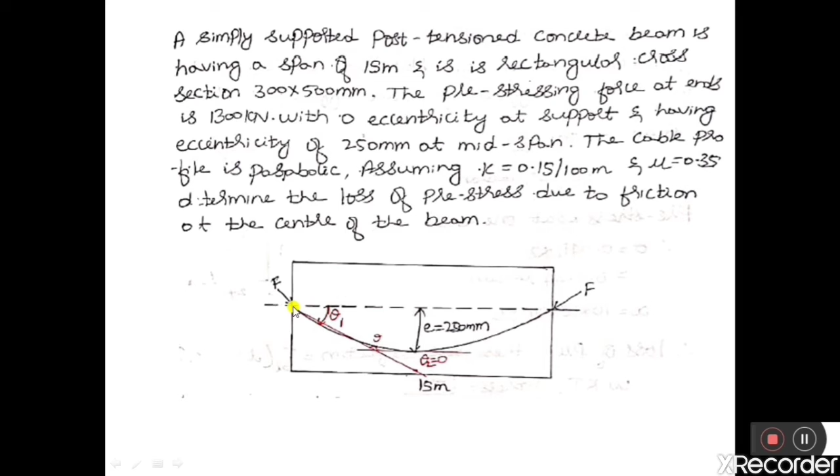So we know the formula to calculate loss of prestress due to friction: it is equal to Fsi into (Kx plus mu theta). Fsi is nothing but the initial prestress. But in the question, they have not given the initial prestress; they have given the initial prestressing force, that is 1300 kilonewton. K is given, it is 0.15 per 100 meter. X we can calculate from the given condition. Mu is given and theta we should calculate from the given condition.

So here the cable is being pulled from both the ends. When the cable is pulled from both the ends, slope is equal to 4R by L, where R is the central dip or the eccentricity at midspan. So 4 into 250 by L, where L is the length of the beam, that is 15 meters, or 15,000 millimeter. Therefore, slope is equal to 0.0667 radian.

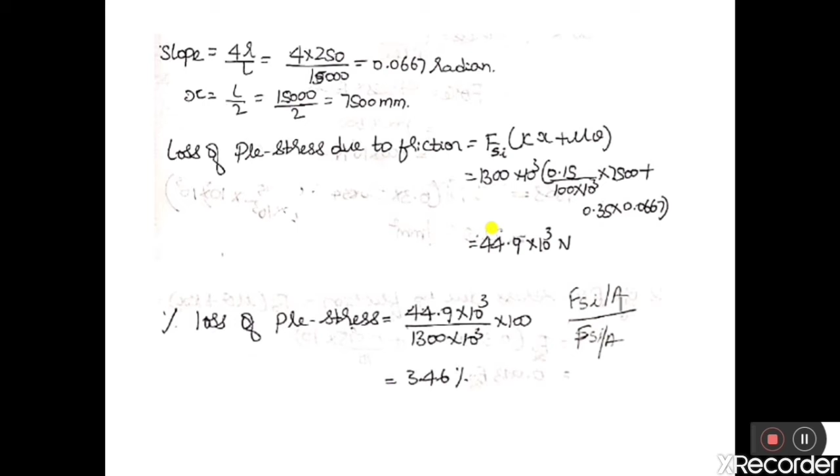Let us go to the next example. So here the question is, a post-tensioned cable of a beam 10 meter long is initially tensioned to a stress of 1000 Newton per mm square at one end. If the tendon is curved so that the slope is 1 in 24 at each end with cross-sectional area of 600 millimeter square, calculate loss of pre-stress due to friction with the following data.

So the data given are: coefficient of friction between duct and the cable is 0.3, that is mu is equal to 0.3, and friction coefficient for wave effect is equal to 0.0015 per meter, that is K is equal to 0.0015 per meter. So here in this problem they have asked us to calculate what is the loss of pre-stress due to frictional effect.

So here a stress of 1000 Newton per mm square is applied, and the stress is applied only from one end of a cable, and the tendon or cable is having a curved profile, and it is also given that the slope of a cable is 1 in 24. So this is the slope given, theta is equal to 1 by 24. Therefore tan theta is equal to 1 by 24 is the slope.

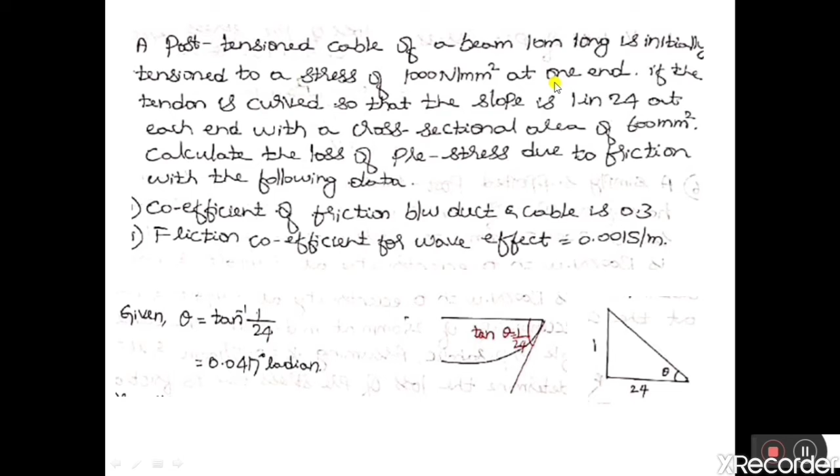Therefore theta is equal to tan inverse of 1 by 24. Hence theta is equal to 0.0417 radian. So this is the theta. And remember that the cable is pulled from only one end. Therefore theta is equal to slope into 2, 0.0417 into 2. Hence theta is equal to 0.0834 radian, and x is equal to 10 into 10 to the power of 3 millimeter. X is equal to L.

And we know the formula to calculate loss due to friction, that is FSI into (mu theta plus K into X). So loss is equal to FSI, the initial pre-stress, which is given as 1000 Newton per millimeter square. Mu is given as 0.3, theta we have calculated by the given slope, plus K is given, into X. So loss is equal to 40 Newton per mm square.

Therefore, percentage of loss of pre-stress due to friction is equal to total loss due to friction divided by initial pre-stress. So total loss due to friction is 40 and the initial pre-stress that was applied to the cable is 1000 Newton per mm square. So 40 divided by 1000 into 100, that is equal to 4%. So loss due to friction in the cable is 4%. So this is what they have asked in the question.

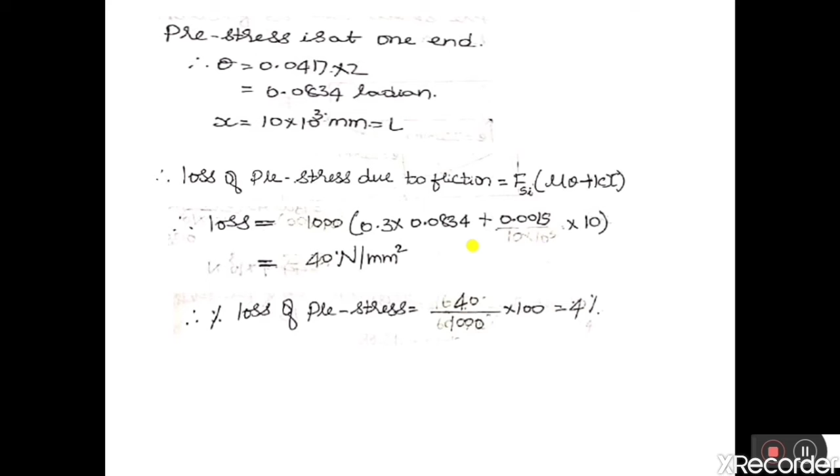And now let us take up one more example. So this question was once asked in the semester exam. There is a post-tensioned beam of span 10 meter, and for this beam we need to calculate what is the jacking force at left end. That is, we need to calculate the initial pre-stressing force that was applied at the left end, and also we should calculate the total losses of stress in the wires.

So the details they have given: the span of beam is 10 meters and the cable is having an eccentricity of 250 millimeter at the midspan. The cable is having a parabolic profile, and they have also given that the initial pre-stressing force in the cable at right end is 250 kilonewton. So remember this, initial pre-stressing force at right end is 250 kilonewton, and we need to calculate the initial pre-stressing force at left end.

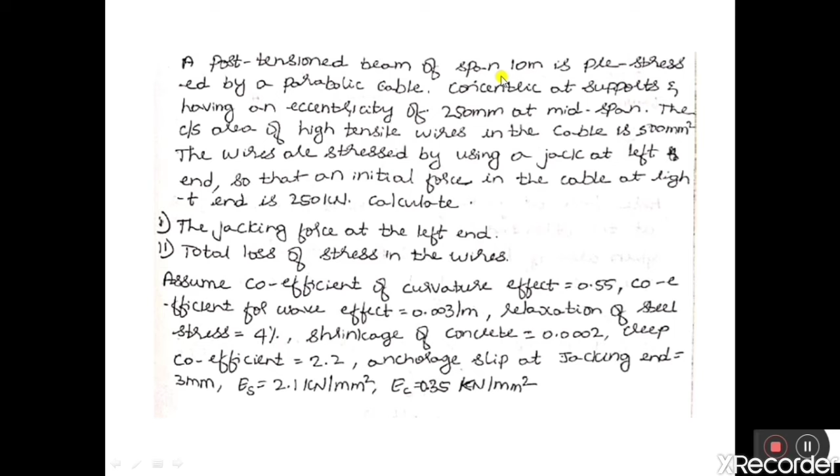So let us assume the overall depth of the cross section as 50 mm per meter span. Let the section be provided as rectangular section. Therefore, overall depth D is equal to 50 into 10, where 10 is span of a beam. Therefore, overall depth is equal to 500 millimeter. Since eccentricity is given as 250 mm at the midspan, we should provide a cover of at least 50 mm to 100 mm.

Therefore, let us provide a depth of cross section as 600 mm by considering the thickness of covers from 50 mm to 100 mm, and by considering the eccentricity, let us make the depth as 600 mm. And let us consider width of the cross section, or width of the beam, is equal to 0.5 into 600, that is 300 mm. So this is the cross section of a beam. Depth is 600 mm, width is 300 mm.

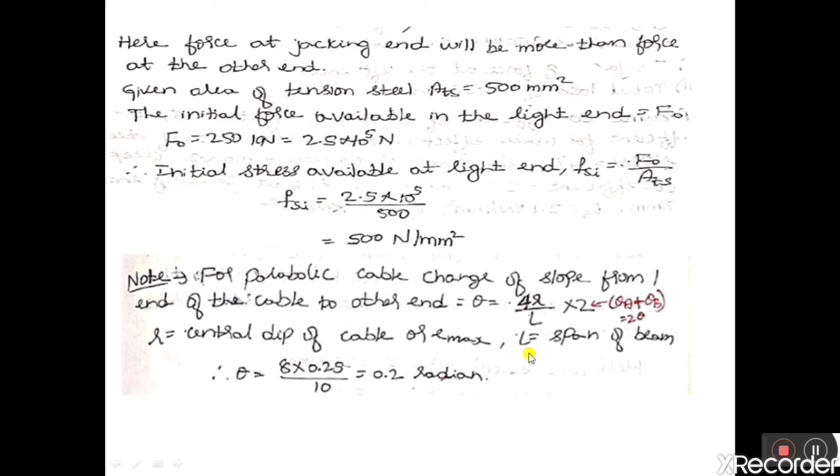So L is the span of beam, therefore X is equal to L, which is equal to 10 meters. Therefore loss of pre-stress due to friction, this is the formula. So substitute the calculated values in this formula. Mu is given, theta we have calculated, it is 0.2, plus K is given, X is equal to L because the cable is pulled only from one end, therefore X is equal to L, it is 10 meters.

Fsi, that is initial pre-stress at left end, which is not given, so let us keep it as Fsi only. Therefore losses due to friction is equal to 0.14 Fsi. So this is the friction loss occurring when the force has traveled from this end to this end; the loss is 0.14 Fsi.

And we know that the pre-stressing force or pre-stress which is applied at left end will be full. If I am going to apply a pre-stress of 1000 Newton per mm square, then the stress at this point will be 1000 Newton per mm square only. The losses at this end will be 0. The loss of pre-stress at jacking end is 0 due to friction because there is no friction at this jacking end.

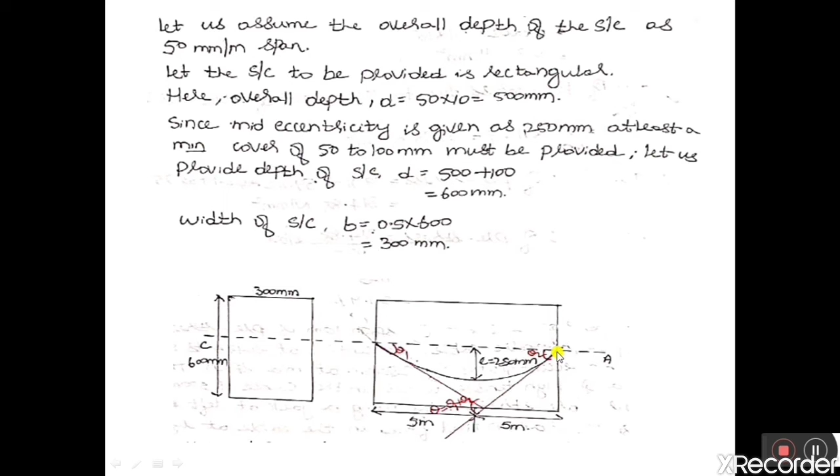We already know the stress at this end is 500 Newton per mm square. So 500 is equal to 100% Fsi minus loss. 100% means 1 into Fsi, minus loss 0.14 Fsi. So 1 Fsi minus 0.14 Fsi is equal to 0.86 Fsi. Therefore, stress at left end is equal to 500 by 0.86, that is equal to 581.4 Newton per mm square.

So the stress at right end was 500 Newton per mm square, and the stress at left end is more than 500 Newton per mm square. It is 581.4 Newton per mm square. So the total loss of stress from 0 to 10 meters is 81.4 Newton per mm square.

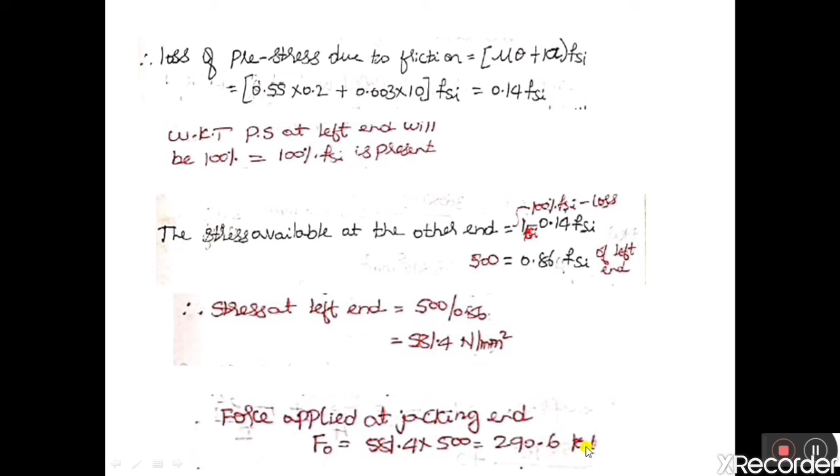Therefore, for the force applied at jacking end, we know the stress at left end, and we know the cross-section area of the tension steel. Initial pre-stressing force is equal to stress into area. Stress is 581.4 into area 500. So 290.6 kilonewton is the initial pre-stressing force applied at left end. So we have calculated the first case.

Now coming to the second case: calculate the total losses of pre-stress in the cable. First let us consider loss due to anchorage slip. The formula is delta A into Es by L. The slip in the anchor is 3 mm, L is 10 meters, in millimeters 10,000, into 2.1 into 10 to the power of 5, which is Young's modulus of steel. Therefore, loss due to anchorage slip is 31.5 Newton per mm square.

Now let us calculate loss due to elastic shortening. To calculate the loss due to elastic shortening and creep, we need fc, the compressive stress developed in the concrete at the CG of tendons or cable. But here we have two different eccentricities: 250 mm at the midspan, and 0 at the ends. For both conditions, different compressive stresses are developed in the concrete.

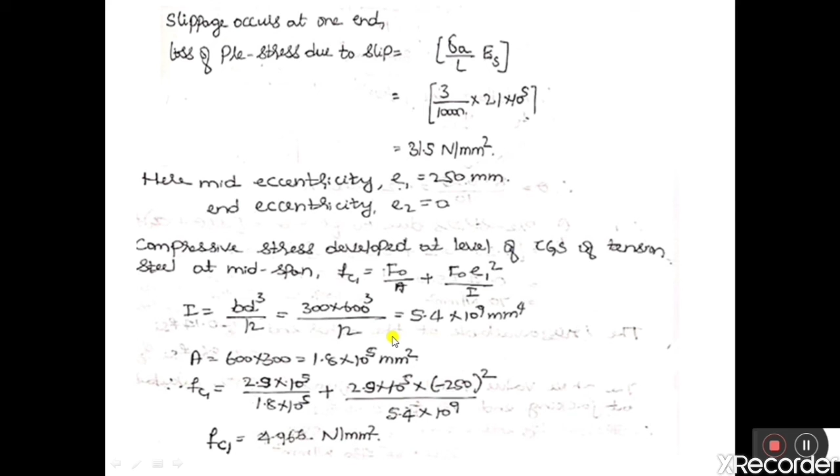So let us calculate compressive stresses developed at the level of CGs of tension steel at support, that is FC2. The previous one we have taken as FC1, and this one let us take as FC2. So FC2 is equal to F naught by A plus F naught e2 square by I. Here the eccentricity is 0 because at the support the eccentricity of cable is 0, so this term vanishes. Therefore FC2 is equal to 2.5 into 10 to the power of 5 divided by 1.8 into 10 to the power of 5, which is 1.389 Newton per mm square.

So why we need to calculate compressive stresses for different eccentricities is because with respect to the different eccentricity the losses will vary. Now we have two compressive stresses with respect to two eccentricities. Then what will be the resultant compressive stress with respect to the CG of tension steel? If we draw a stress diagram, this rectangular portion is FC2, due to end eccentricity of 0 mm, and this parabolic portion is the compressive stress developed due to eccentricity of 250 mm. So this is the stress diagram for both the cases.

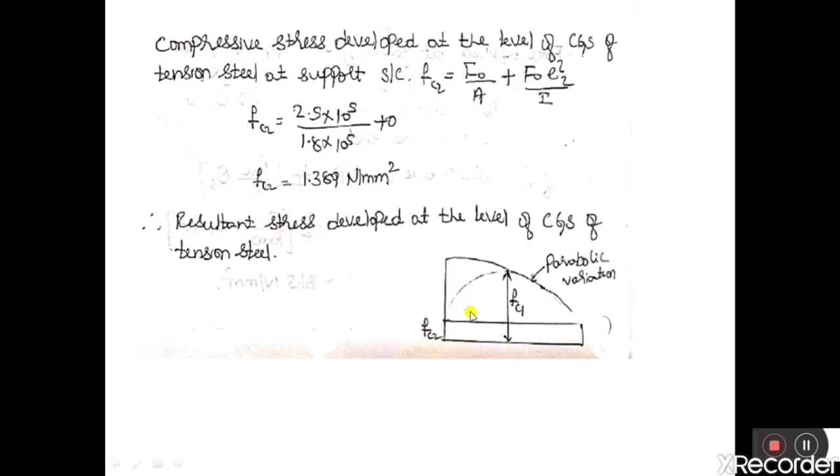Therefore, the resultant compressive stress Fc is equal to, so remember this equation, Fc2 plus all this portion. Fc2 we know is 1.389. Plus the remaining parabolic portion, which is 2 by 3, because it is a parabolic portion. So 2 by 3 into Fc1 minus Fc2. You can see here from here to here it is Fc1, and already we have taken this depth as Fc2. Therefore, the remaining portion is Fc1 minus this depth.

So Fc is equal to Fc2 plus 2 by 3 into Fc1 minus Fc2. You should remember this condition. Therefore, Fc is equal to 3.77 Newton per mm square. So the resultant compressive stress in the concrete with respect to CGs of tensioned steel is 3.77 Newton per mm square. Now let us calculate different losses.

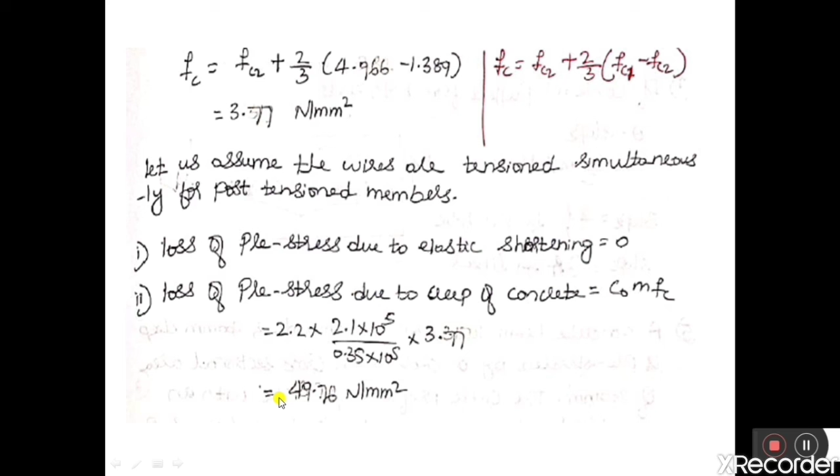So firstly, loss of prestress due to elastic shortening is equal to 0. It is 0 when the cables are pulled simultaneously. If there are 10 cables and all 10 are pulled together, the loss due to elastic shortening is 0 in case of post-tensioned member. Second, loss of prestress due to creep of concrete, phi m Fc. Here the creep coefficient is given, not the ultimate creep strain, hence we use this formula. Creep coefficient is 2.2, m is the modular ratio Es by Ec, given in the question, into Fc, the resultant compressive stress. Substituting the values, loss due to creep is 49.76 Newton per mm square.

Loss due to shrinkage of concrete. We know the formula delta S into Es. Delta S, the shrinkage coefficient, is given in the question, and Es, Young's modulus of steel, is also given. Therefore, loss due to shrinkage is 42 Newton per mm square. Then loss of prestress due to relaxation of steel. The question gives the loss due to relaxation of steel as 4% of initial prestress, so 4 by 100 into 500. Therefore, loss due to relaxation of steel is 20 Newton per mm square.

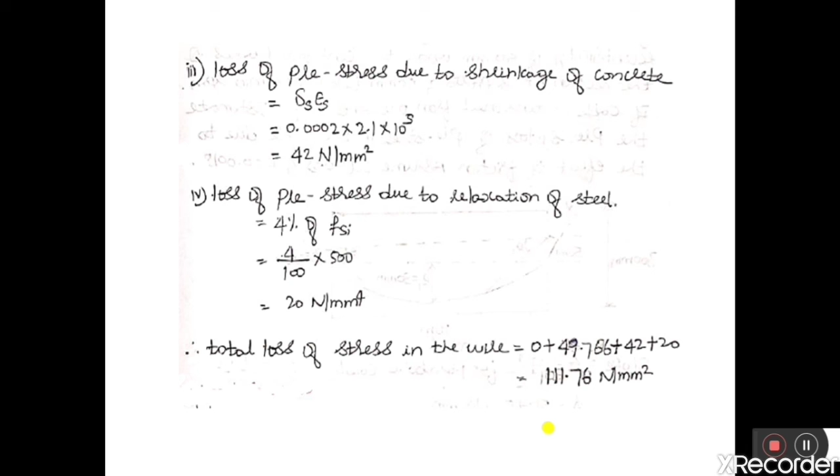Therefore, total loss of prestress in the cable is equal to 0, due to elastic shortening, plus 49.766 plus 42 plus 20, which is 111.76 Newton per mm square. So this is the second case, total losses in the cable.